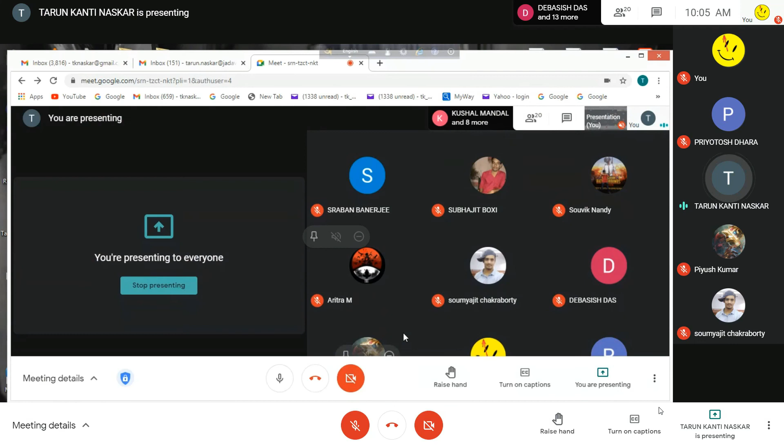Today I am in district, so the video will not be opened. There may be a problem. Can you listen to me? Yes, sir.

Okay, now my first proposal is one date should be fixed for the first class test. Which date should it be? Getting 1 week time will be sufficient.

Hello. That means if it is on the 10th. Sir, second week of December would be better, sir, like middle of December. 10th is second week, so mid of December, sir. Yes, mid of December, then 14th. Yes sir, give us 2 weeks then we can do it. So properly, make it 14th December, is it?

Okay, so 14th December, that is Monday. What is your class time? It is from 1 to 2, is it? Okay, so 14th December will be your class test.

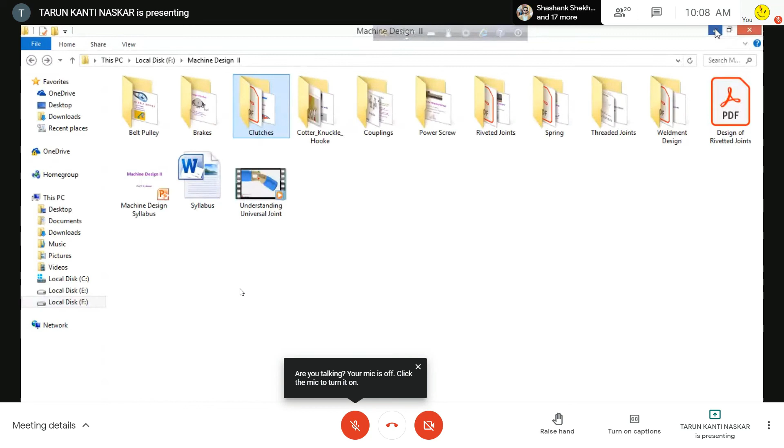And regarding the syllabus of the class test, it will be coupling, power screw, riveted joint, and threaded joint. Coupling, power screw, riveted joint, and threaded joint. Is it okay?

Sir, can you please remove the threaded joint? I think 3 topics would be fine for us, given the time period. The rest, keeping in mind, will be too large for your second test.

So the syllabus will be: coupling, then threaded joint, riveted joint, and power screw, on 14th December. Coupling, threaded joint, riveted joint, power screw - that is the syllabus for the first test. I have written it on the chat. So this will be your syllabus.

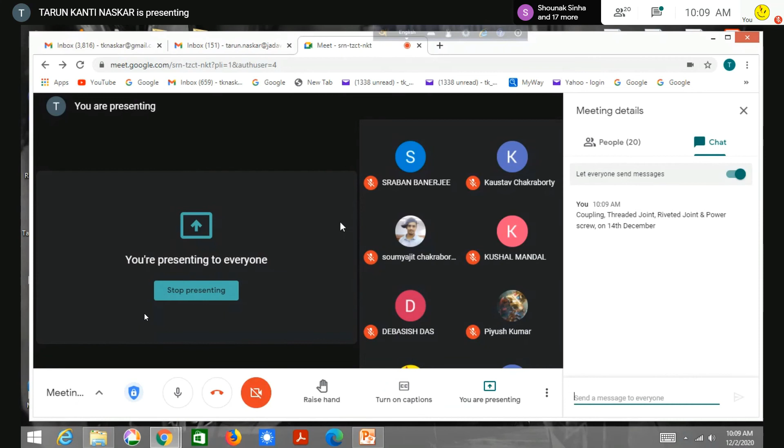Now let us start. The screen is visible, yes sir. So today we will discuss the cone clutch.

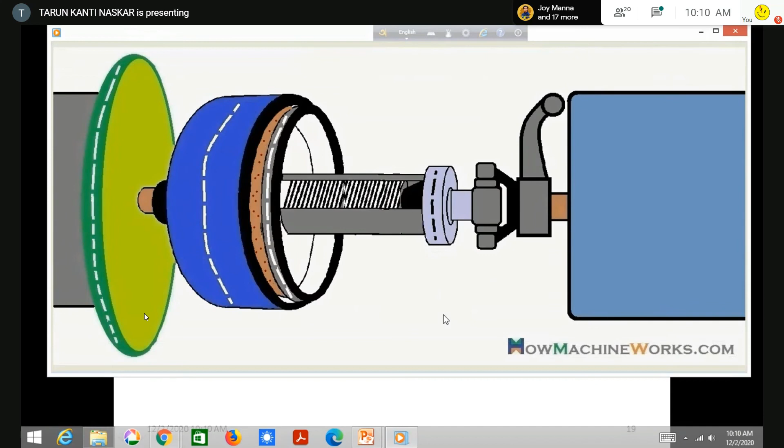Now there is a video regarding the function of the cone clutch. Can you listen? Is the video audible? Sir, the video is not that audible. The video settings are not that audible.

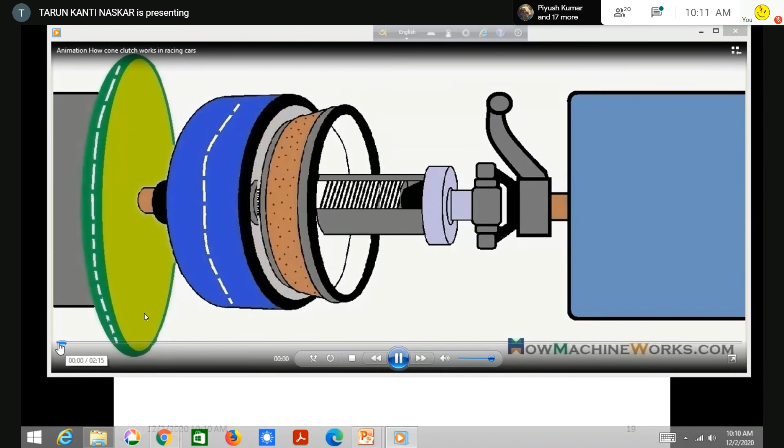Hi guys, welcome to HowMachineWorks.com. Today, with the help of this animation, let's learn how a cone clutch works. First, we will identify all the components in the system, then explain its working with the help of this animation.

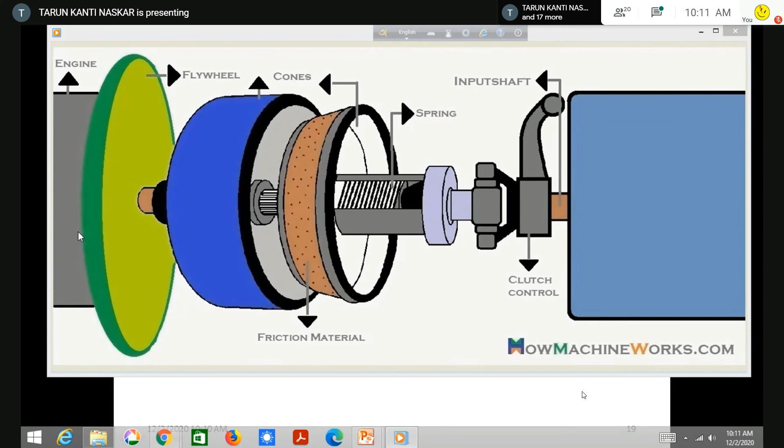First, that's the engine, then we have the flywheel. Those are the two cones - the blue one is the female cone, the brown one is the male cone. On the male cone we have friction materials. That's a spring over there, and that's the clutch control. That's the input shaft towards the transmission, and finally we have the transmission or the gearbox.

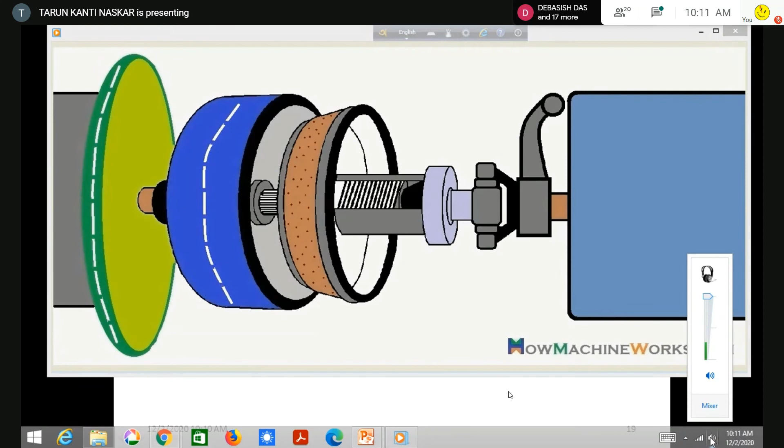Now let's see - the drive is getting towards the flywheel from the engine, and as the female cone, which is in blue, is part of the flywheel, it also starts rotating. So you can see the female part of the cone rotating, and the male part is disengaged from the female part. So the drive is not going into the male part or into the transmission. That's the portion highlighted where the male cone mates with the female cone, and that's the friction material over there.

As the male cone moves inside, they mate together and the drive goes towards the transmission. Now I am activating the clutch lever control so that the drive can be transmitted, and the male cone gets in contact with the female cone. So now you can see the drive from the flywheel, reaching the female cone, is carried away by the male cone, and it gets into the input shaft and finally towards the transmission. That's how the transmission gets the drive.

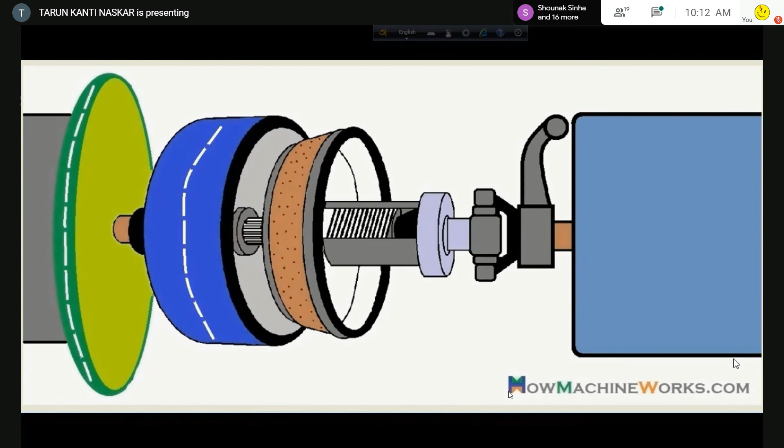Now I am moving the lever back so that the clutch can be disengaged. The female part is disengaged from the male part - you can see the male part going away, and now the drive from the flywheel rests with the female clutch, and the drive is not going into the transmission. That's how simply a cone type clutch actually works, and this is mainly used in racing cars also. I believe you understand how it works. For more videos, please click.

Hi guys, welcome. This is the engine. How a cone type clutch exactly works. First, we'll identify all the components in the system. Then we'll explain its working with the help of this animation.

First, that's the engine. Then we have the flywheel. Those are the two cones. The blue one is a female. This female part is attached to the driving side. This male part is attached to the driven side. On the male there is the spring, and this is the

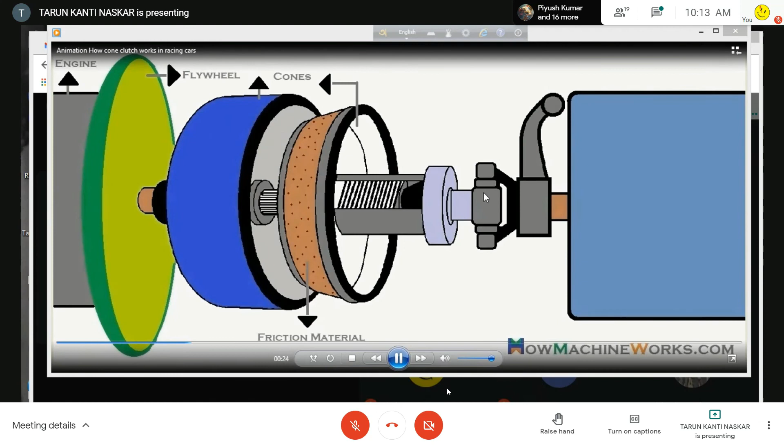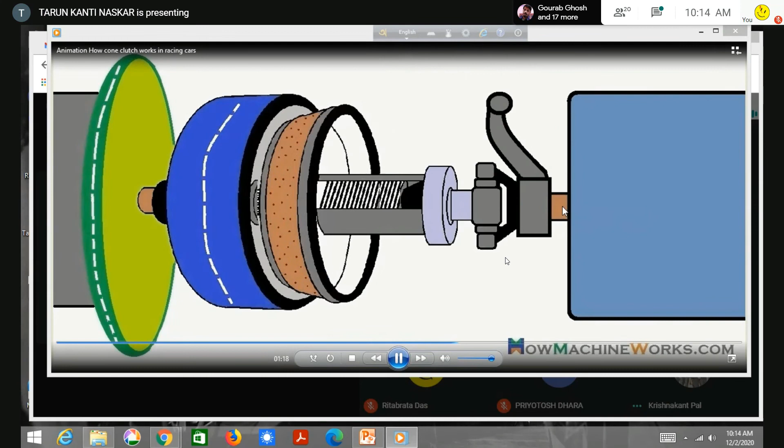lever or clutch control arm, and there is this spline shaft so that it can be shifted. When the engine is moving, the flywheel is moving, and it gives speed to the female part of the clutch, this blue part. Now when it is driven to that, this friction lining comes in contact with that. Then this shaft rotates, and then it gives power to the transmission gearbox. This is the transmission gearbox.

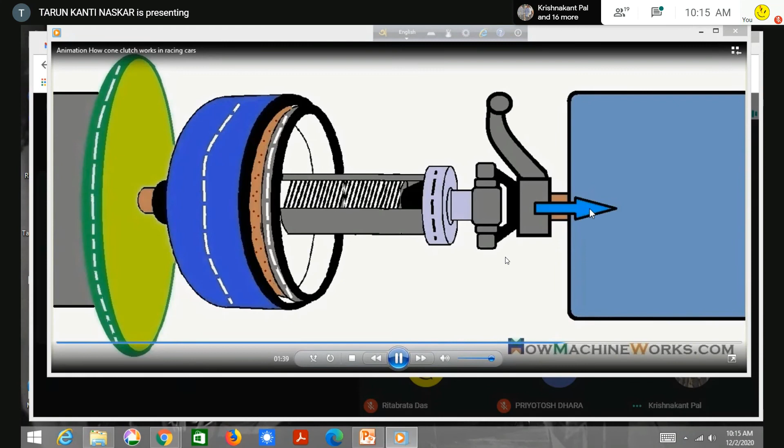Then when we disengage it by moving this, this will be shifted to that side. So you see this is being shifted to that side. When this is shifted, the engine is rotating, the flywheel is rotating, this clutch is rotating, but the driven side is not rotating. So this is the function of the cone clutch.

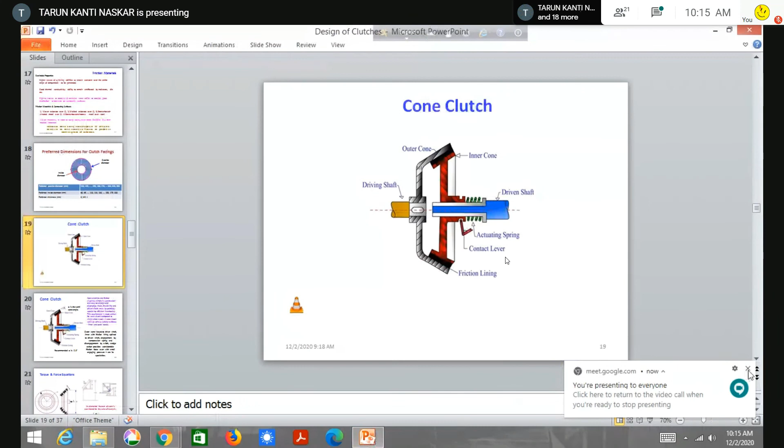Would you understand? Yes, sir. Okay. Sir, can you replay the last part, the cone clutch, the lever part?

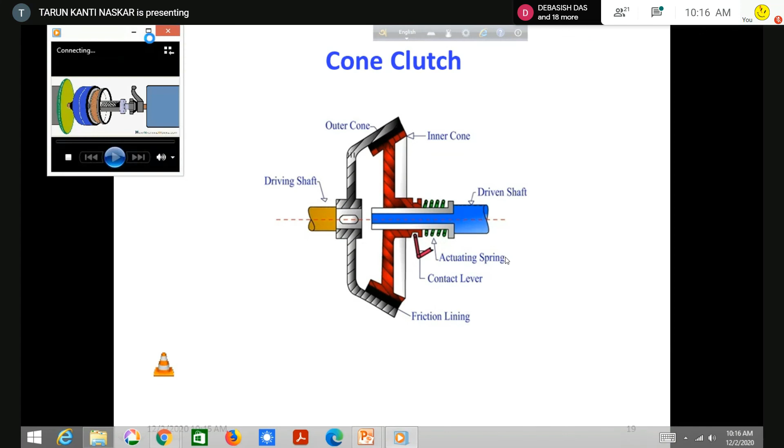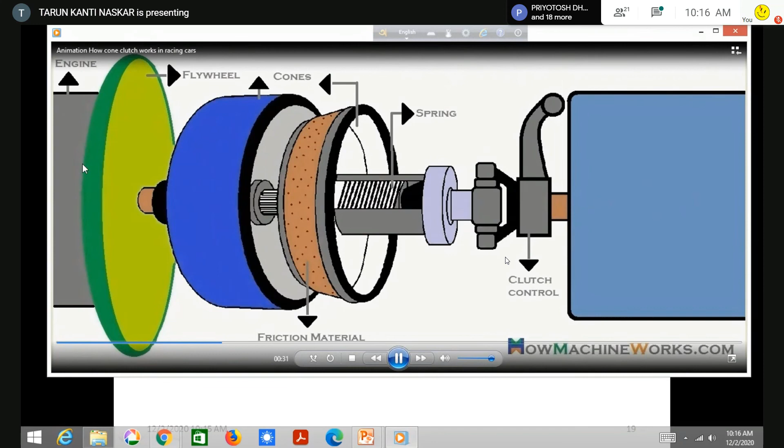Today, with the help of this animation, we will see how a cone clutch works. First, we identify all the components. This is the lever. By moving this lever, it is engaged or disengaged. When it is engaged, the speed of the engine comes over there to the transmission gearbox input shaft. And when it is disengaged, in spite of movement of the engine, there is no speed to the transmission gearbox because it is disengaged.

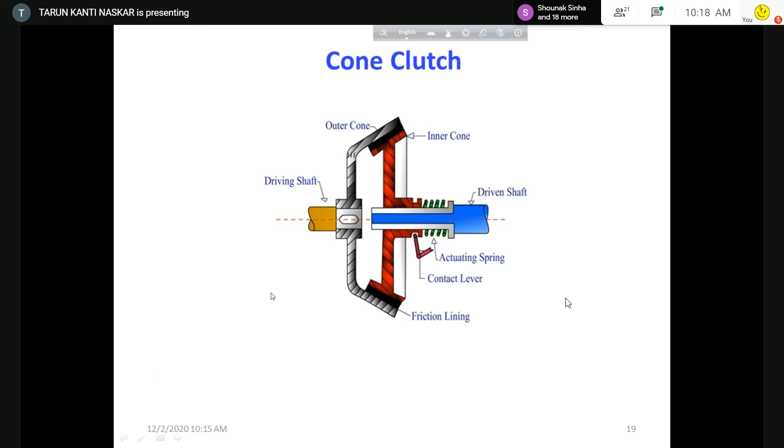Sir, you will give us the question and we'll have to give you back the answers within a stipulated time? Yes, and that time is fixed by the university. That I will tell you. Just remember what is the time. Okay, sir. Pretty much clear, sir. Understood, sir. Thank you.

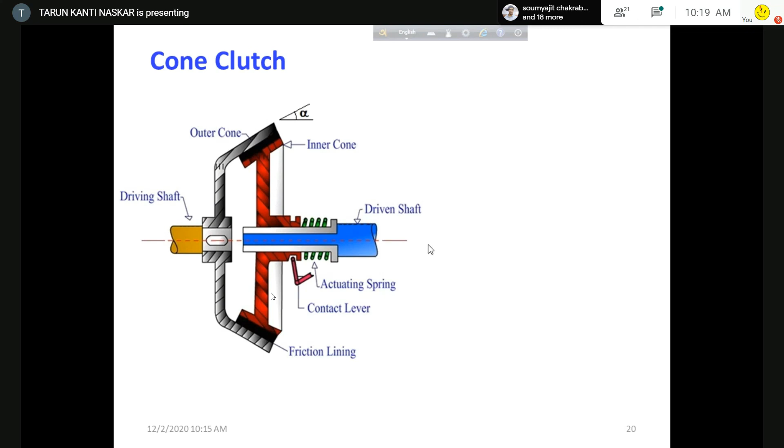Now this is the cone clutch. Cone clutches are friction clutches. Obviously, it is simple in construction, easy to engage and disengage. Now this is the driving part. This is your female part. This is your male part. The female part is attached to the driving side. The male part is attached to the driven side. And there is the handle, the contact lever. Now there is a friction angle, friction material. And due to this wedge action, the engagement and disengagement is very easy and complete.

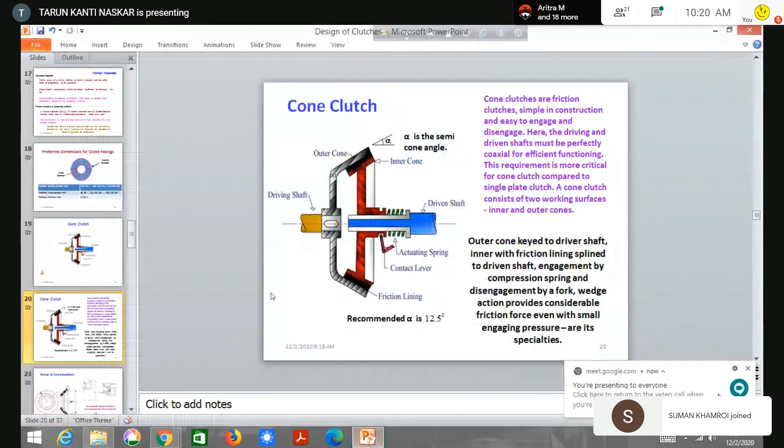Now one requirement for this is that they should be perfectly coaxial, otherwise there will be problems. Obviously you can understand the necessity of this requirement. So a cone clutch consists of two working surfaces, one inner and another one outer. Now the outer cone is keyed to the driving side, I have already told you. Now this wedge action provides considerable friction force. Even with small engaging pressure, there is considerable friction force. This is the advantage of this type of clutch.

Now alpha is the semi-cone angle, and the recommended value of this semi-cone angle is 12.5 degrees. And there is a deduction. I will show you the deduction, how we reach this value of 12.5 degrees and why it is 12.5 degrees. That will be discussed later. Okay, so the description is clear.

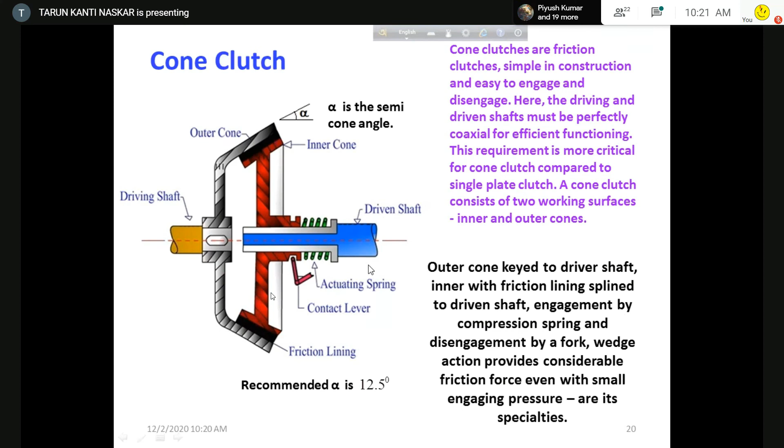Is it clear description? Yes, sir. Okay.

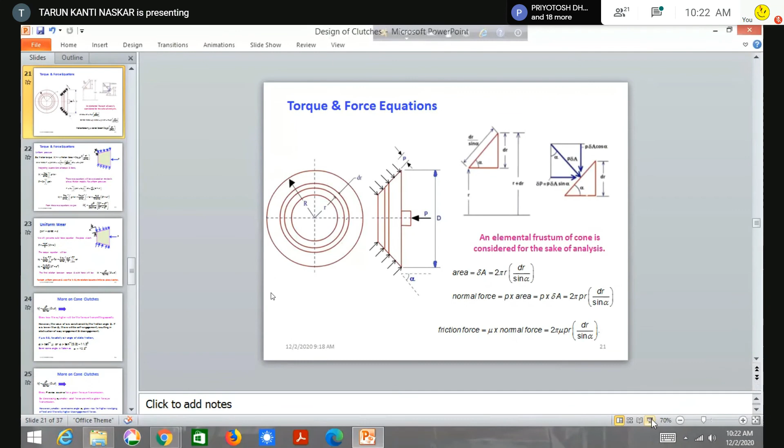Now for forces, this is the normal force p delta A. This is p, small p. So p delta A is the normal force. Now this is p delta A cosine alpha, and this is p delta A sine alpha. So this is the elemental frustum of cone.

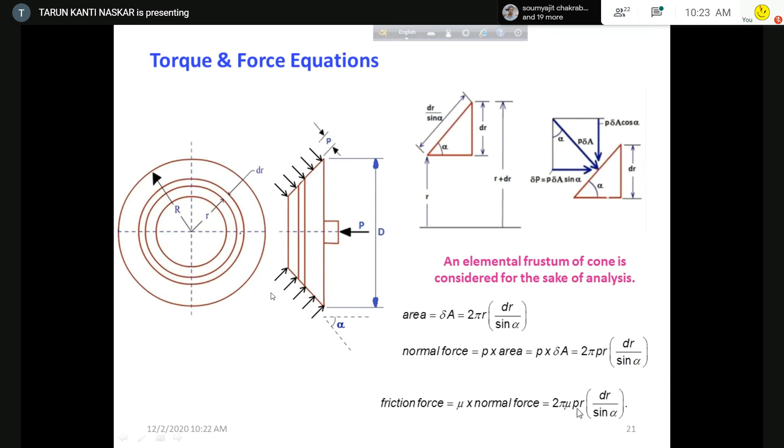Now area. Area is delta A, that is twice pi r multiplied by dr by sine alpha. Now normal force is p multiplied by area, that is p multiplied by delta A, which is equal to twice pi p r dr by sine alpha. So this is the normal force. Now obviously the friction force is obtained by multiplying by mu, that is twice pi mu p r dr by sine alpha.

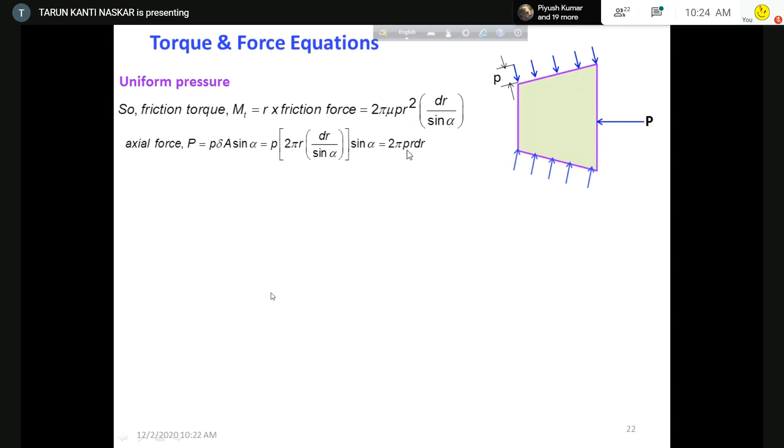Now we have to use two models, uniform pressure and uniform wear. Friction torque MT will be r into friction force, that is twice pi mu p r square dr by sine alpha. So this is the friction torque. The axial force P is small p delta A sine alpha, and ultimately the expression for axial force P is twice pi p r dr.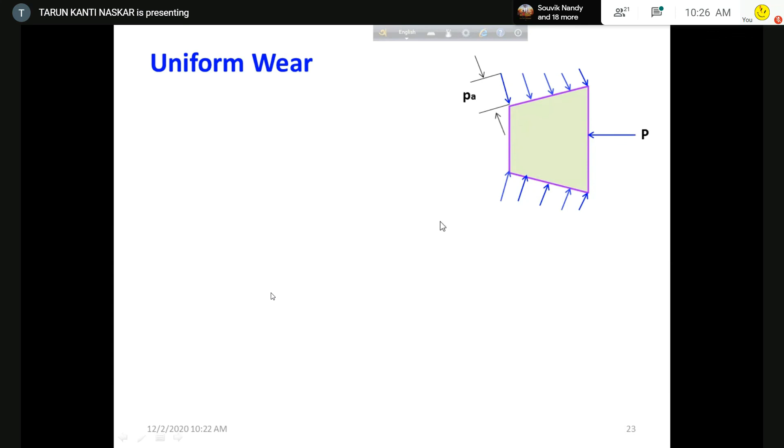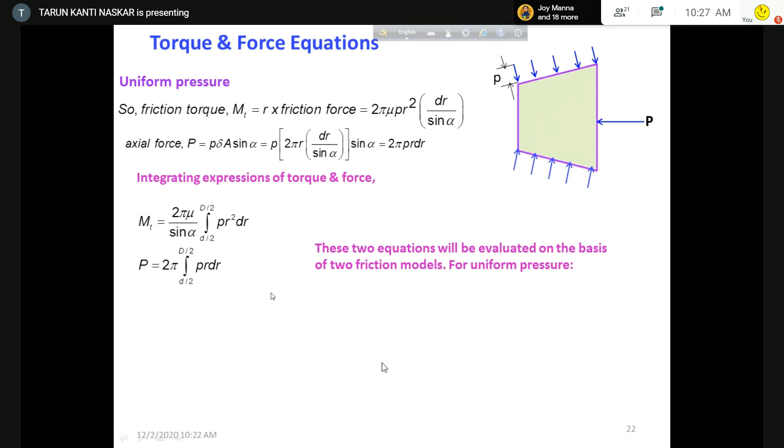Now for uniform wear, p r is equal to constant. So p will be varying obviously, such that r is increasing and p is decreasing so that this is constant. And we will get the same axial force equation as the plate clutch. Now the torque equation is this expression from the earlier slide. This is the expression for torque.

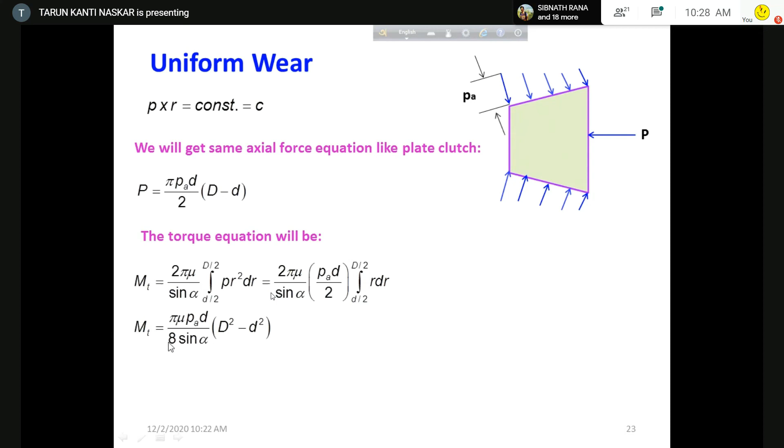Integrating this, since p r is constant, you take out p r. p r means p a d by 2. Then integrate r dr between small d by 2 and capital D by 2, and the expression for MT will be this. So the final relation between torque and axial force will be MT equal to mu p by 4 sin alpha into D plus small d. Put alpha equal to 90 degrees, the expression will be the same as for the plate clutch. You only have to introduce sin alpha when you are considering the cone clutch. For both uniform pressure and wear, if alpha is 90 degrees, the relations become similar to plate clutches.

Is it okay? The wear equations, is it okay? Is it clear to you? Anyone respond? Are you here? Yes, sir. Oh, I am searching whether you are here or not.

Sir, can you please redisplay the derivation of the frictional torque? Yes.

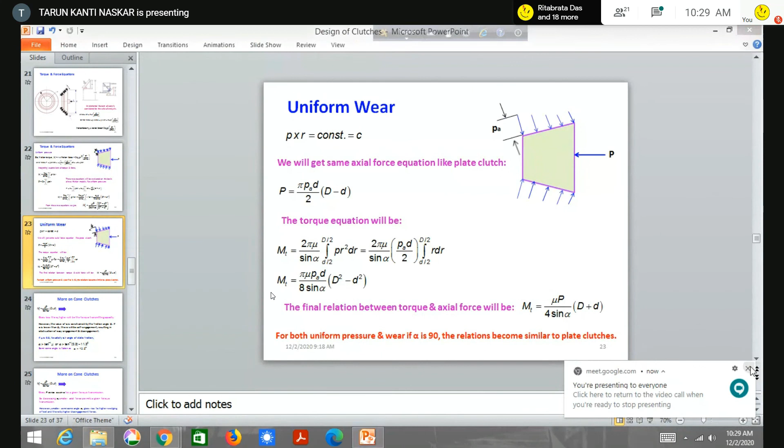Okay, sir. It's okay.

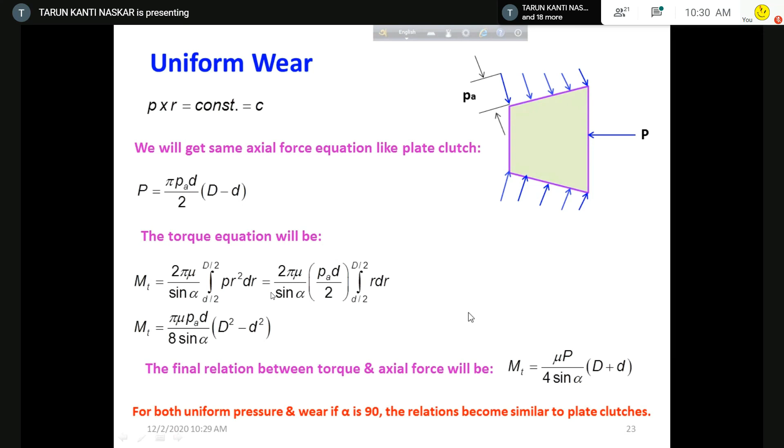You have to take out PR, and PR means PA d by 2. Okay, can I go to next slide? Yes. So this is the expression for MT.

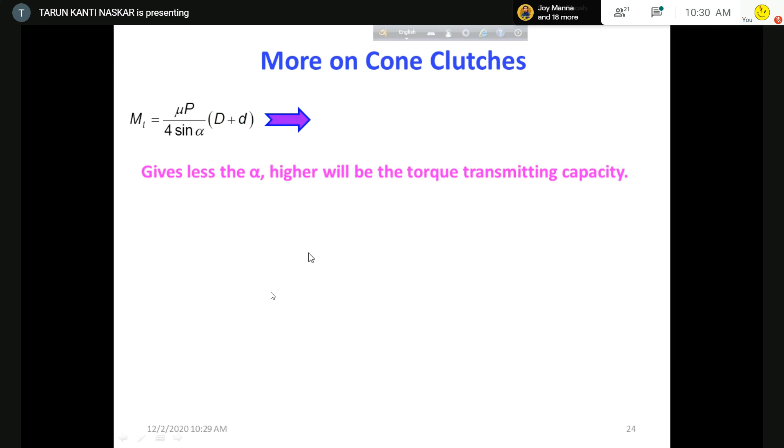Now this equation gives: the lower the alpha, the higher the torque transmitting capacity. But when alpha is less, there will be a problem for engagement and disengagement, that is more wedge action. However, the value of alpha is constrained by the friction angle also. If alpha is lower than phi, that is the friction angle, there will be self engagement, resulting in obstruction of easy engagement and disengagement.

Okay, so there is a constraint for lowering the value of alpha, and say if mu is 0.2, to satisfy alpha greater than the angle of static friction, alpha should be greater than tan inverse mu, means alpha should be greater than tan inverse 0.2, that is 11.3 degree. So considering different values of mu, we normally take alpha equal to 12.5 degree. That means it should not be very low. It should not be lower than this, because if it is lower than this, there will be more wedge action, and more wedge action means there is a problem of engagement and disengagement also.

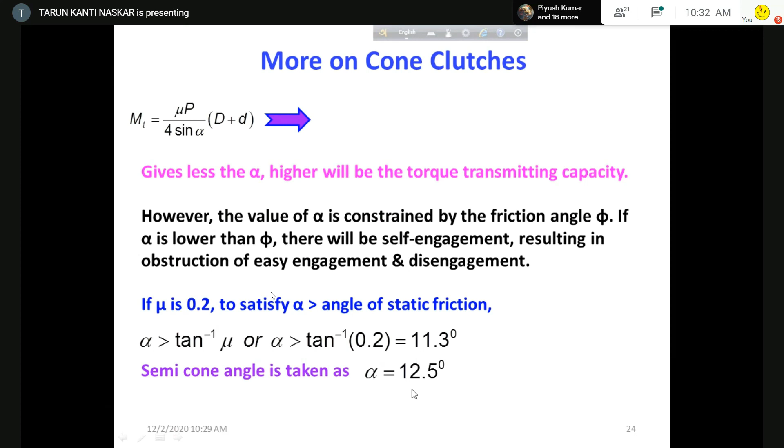Okay, and another constraint is phi. Is it okay? Clear? So I pointed out the value of 12.5 degree, why it is normally recommended as 12.5 degree.

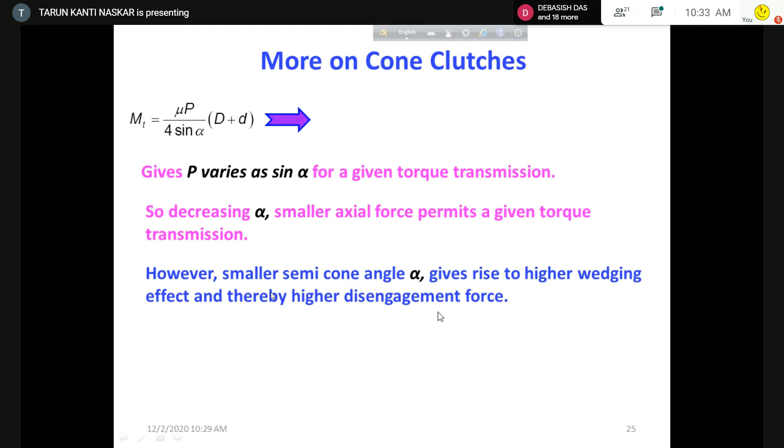Now some more points. If MT is constant, that means for a particular value of MT, P varies as sin alpha for a given torque transmission. So decreasing alpha, smaller axial force permits a given torque transmission. That means decreasing alpha, the sin alpha value is decreasing, so P will be decreasing, that means smaller axial force. But smaller alpha means smaller semi-cone angle, so higher wedging effect, thereby higher disengagement force. Engagement is very easy, but higher disengagement force.

This point is okay? Now this is the ratio of MT value for cone and plate. So MT cone by MT plate equals 1 by sin alpha. That is 1 by sin 12.5 degree, so 4.62. So MT cone is so much higher. For given dimensions, torque transmitting capacity of cone clutch is higher than that of single plate clutch.

Is it okay? So we have to consider the constraints for lowering the value of alpha. One is the wedging effect, and another one is the value of static angle of friction. Okay, is it okay? Can I go to next slide?

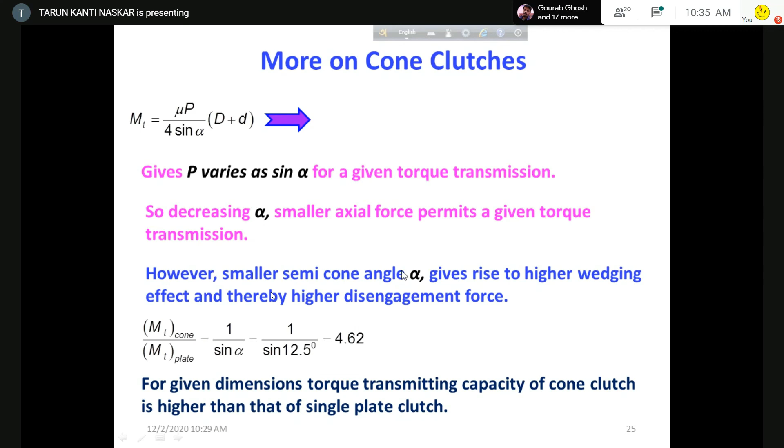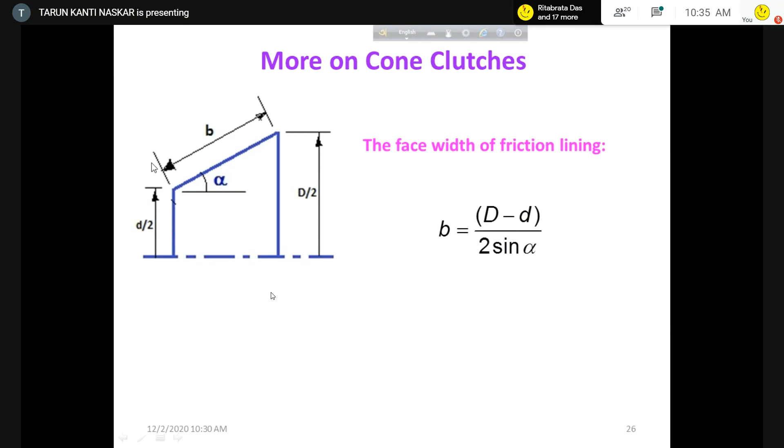Now face width of friction lining. So this is the face width of friction lining, and the expression for face width is this. Okay, this is all about cone clutch. Now we will go to the centrifugal clutch. This is a very simple expression, that is the face width of cone clutch. Now centrifugal clutch. It is very interesting, and there is a video.

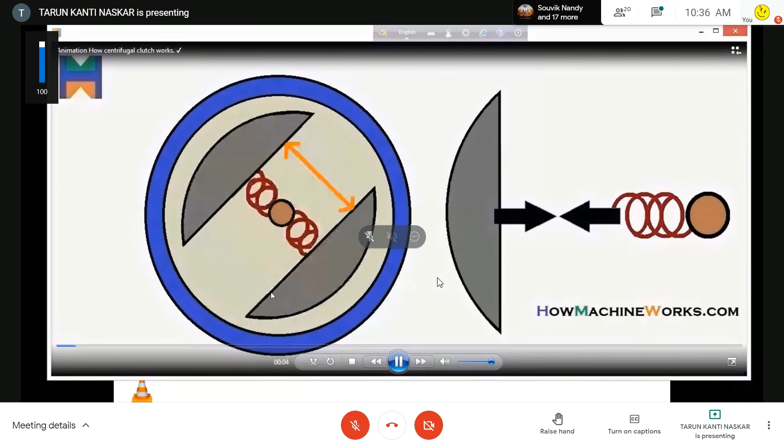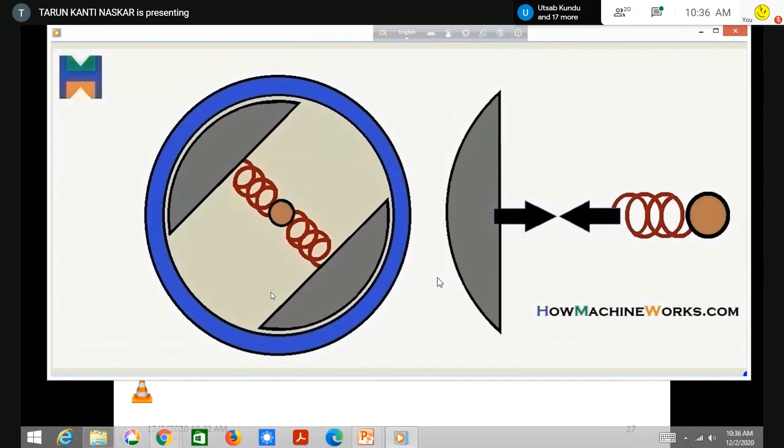Hi guys, welcome back to howmachineworks.com. With the help of this animation, let's learn how a centrifugal clutch actually works. So on the screen you have a centrifugal clutch animation. That's the clutch housing. Transmission. And we have clutch shoes inside. Then we have the engine shaft that's drive from the engine reaching the centrifugal clutch. Then we have the springs connecting the clutch shoes with the shaft.

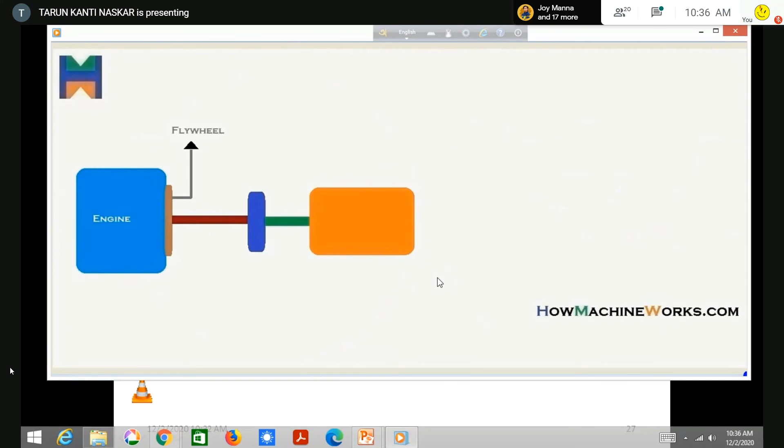Right, so let's see the location where the centrifugal clutch is located. So that's our engine. Okay, then there we have the flywheel. After the flywheel, we have the engine drive shaft. The drive from the engine is going to the clutch. That's the centrifugal clutch over there. Right, then that's the drive to transmission. From the clutch, the drive goes to transmission. And finally, our transmission is there. So let's have a closer look, a zoom look at the centrifugal clutch. So that's a centrifugal clutch, right? And inside we have the clutch shoes, the springs, and the shaft from the engine. So that's here. Okay, that's the location. So now let's see further. When the engine rotates, the RPM goes through the engine shaft. Again, let's see, that's the engine shaft.

It rotates there inside the centrifugal clutch. That results in the centrifugal clutch shoes also rotating because the shaft is connected to it. So as it rotates, what happens? There's a clutch housing connected to the transmission, that's in blue. But you can see the clutch shoes and the clutch housing are not connected because there is a gap. As there is a gap, the drive from the engine, which is reaching the clutch shoes, is not going to the clutch housing. Thereby, it's not going to the transmission.

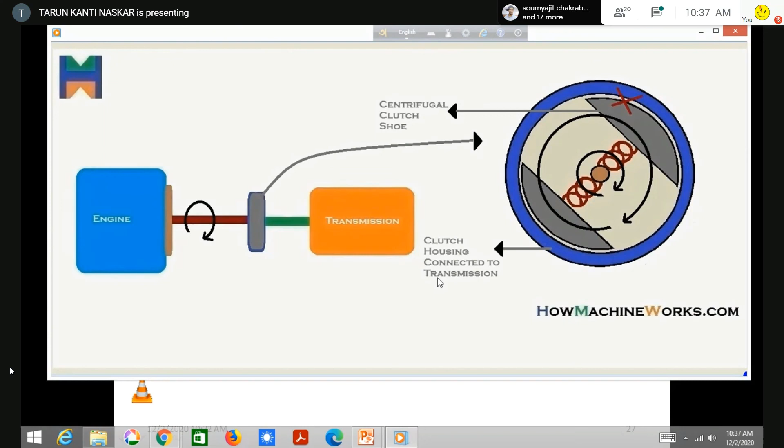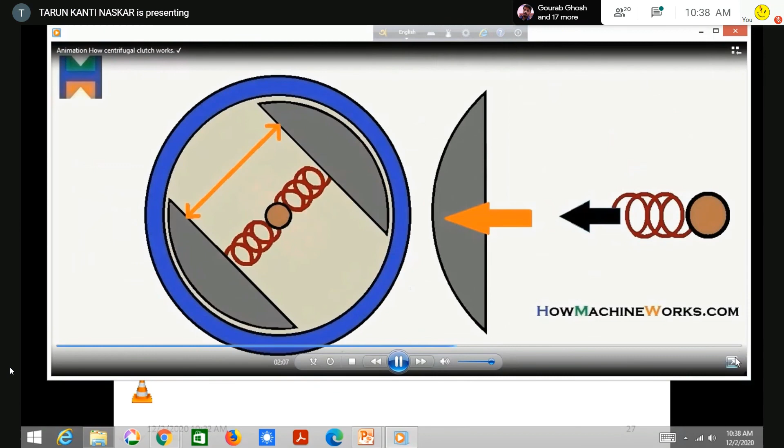So this is how it looks. This is the clutch shoes rotating inside. And as the RPM increases, due to the centrifugal force, you can see the clutch shoes actually get closer to the clutch housing. And further, as the speed increases, they get in contact with the clutch housing. And that's how the drive from the engine, which is reaching the clutch shoes, is getting transmitted to the clutch housing, and thereby it goes to the transmission. This is due to the centrifugal force. That's why it's called a centrifugal clutch.

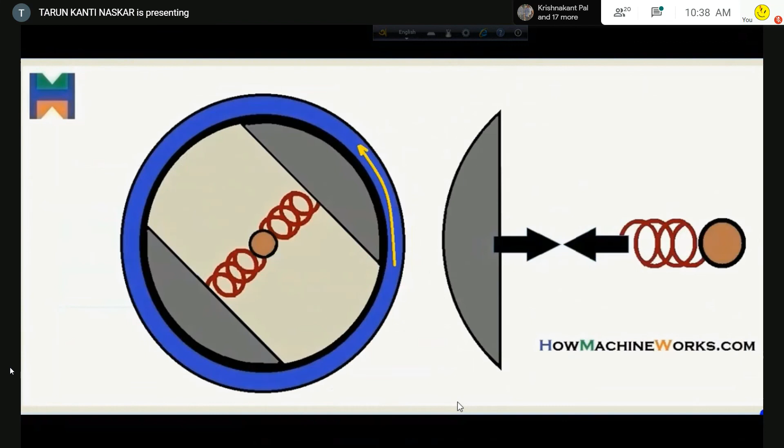So let's see in more detail. The engine is getting the drive. So the engine shaft here rotates like this, and that drive is getting to the shaft inside the centrifugal clutch. As it rotates, you can see the shoes, that's the centrifugal clutch shoes, and the clutch housing get in contact, so that the drive gets to the clutch housing. So that's how the clutch housing is rotating. And see now, as it is in contact, the clutch housing is now rotating.

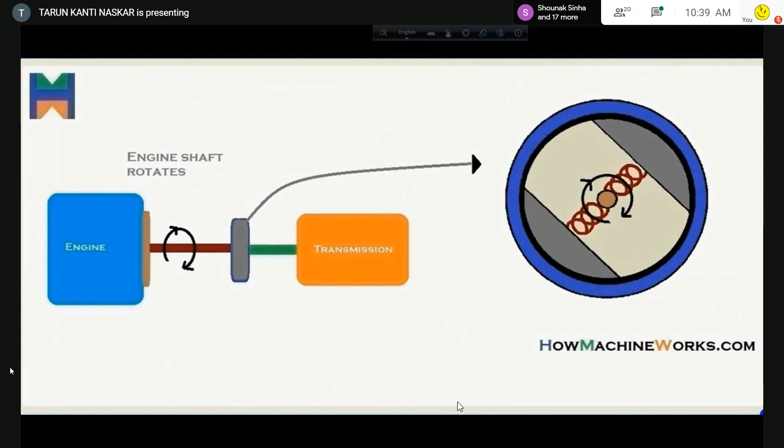And as the clutch housing rotates, the drive from the housing, as it is connected through this particular shaft, the green shaft, that's the clutch shaft, rotates, and that makes the drive reach the transmission finally. So that's how a centrifugal clutch actually works. So I believe you understand its working.

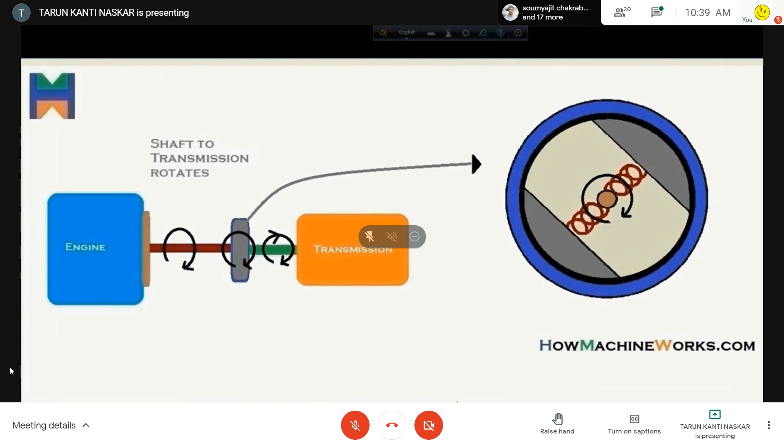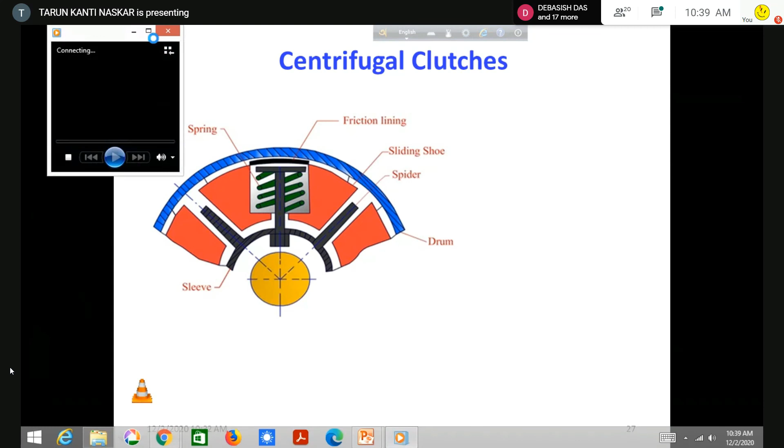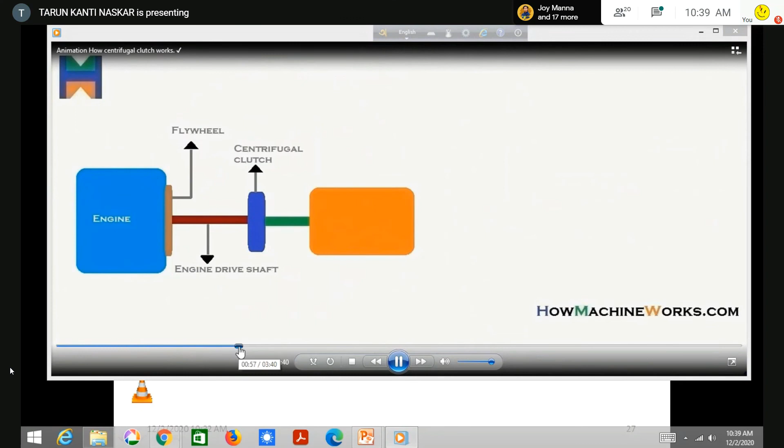There is a spring. So the spring is loaded, which means initially, when it is stopped, the load on the spring is such that they are disconnected. So there is a gap. There is a gap between the shoe and the clutch. This is the shoe, and over it there is a friction lining.

Then what happens when the speed of the engine increases to a certain level? The centrifugal force overcomes the spring force, and as the speed rises, the spring is extended and under tension, and this shoe comes in contact with the clutch, and then ultimately the full synchronization. When full synchronization occurs, the engine speed will be equal to the clutch speed. Then the clutch rotates. When the clutch rotates, the arrangement is such that this green shaft rotates, and then the transmission.

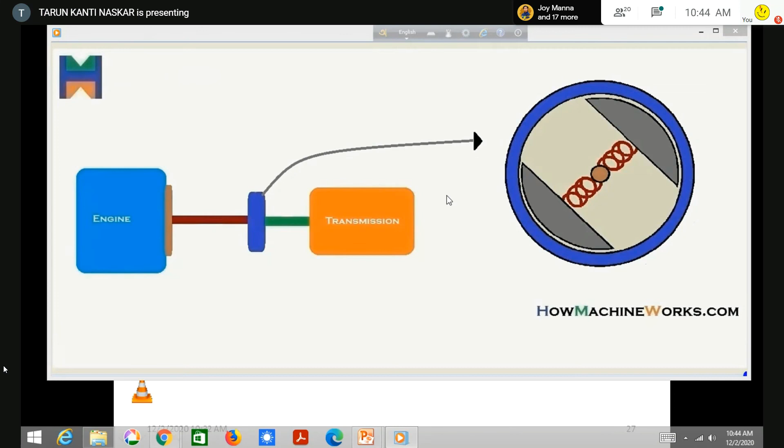Yes, sir. Is it clear? Okay. Then we will go to the equations.

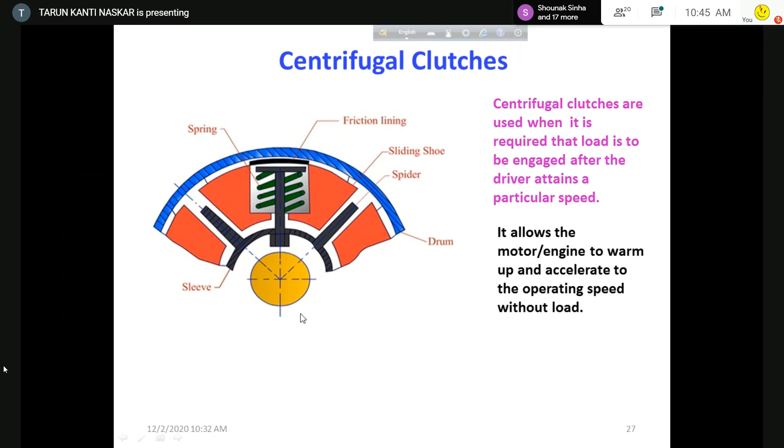Centrifugal clutches are used when the load is to be engaged after the driver attains a particular speed. After attaining a particular speed, the process of engagement starts. It allows the motor or engine to warm up and accelerate to the operating speed without load. Before this shoe comes in contact with the drum, the engine is rotating with no load condition. Is it clear? So it works on this principle.

The centrifugal clutch consists of a spider with four equally placed radial guides, so that the shoes can go into them. There is a spring loaded sliding shoe in each guide. The spider, shoes and springs are inside a coaxial drum, which is attached to the driven side. With the increase of speed of the driving shaft, centrifugal force increases to ensure contact. With the decrease of speed, disengagement occurs. After the speed decreases to a certain level, there will be no contact and the engine will run with no load condition.

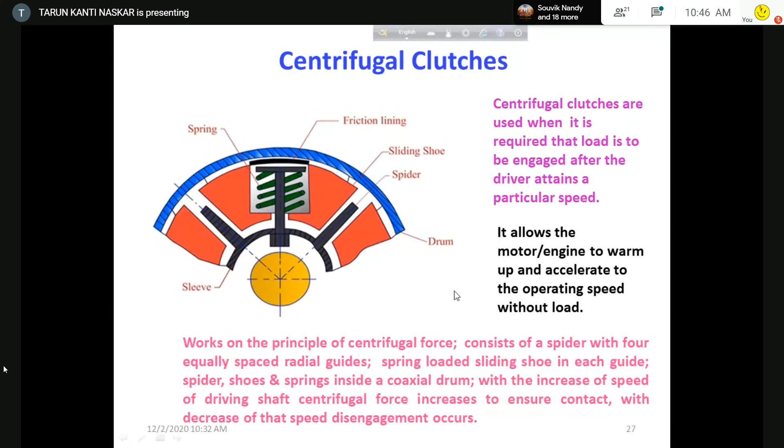Is the description clear? The figure is clear? Hello? Yes, sir. Okay, thank you. Yes, sir. Clear.

Let us go to the mathematical equations. This is the drum, this is the shoe, this is the spring. This is RD, the drum radius, and this is RG, the center of gravity of the shoe. So we have the radius of drum RD, radius of center of gravity of shoe RG, mass of each shoe m, centrifugal force, spring force, number of shoes, running speed, and engagement speed. That means when engagement just starts.

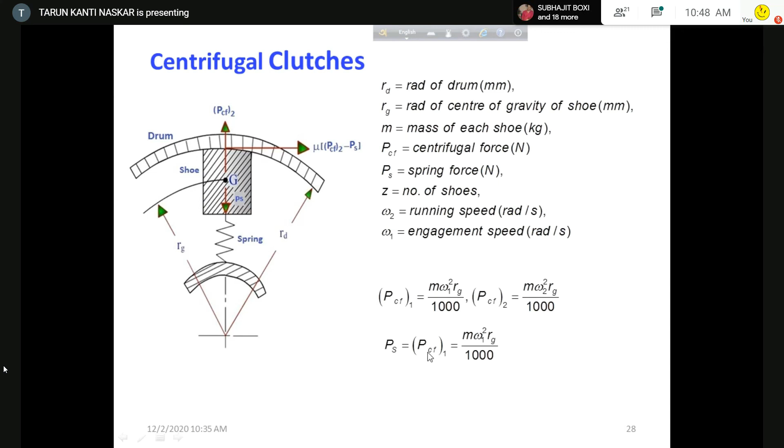When engagement just starts, we have the centrifugal force. Omega 2 is the running speed, at which it should run. These are the expressions for centrifugal force, and PS should be equal to the centrifugal force when engagement just starts. Now when centrifugal force just exceeds the spring force, the shoe begins to move radially outward and engagement occurs. In the running condition, the net force acting on the drum is PCF2 minus PS, that is PCF2 minus PCF1, equal to m RG (omega 2 squared minus omega 1 squared).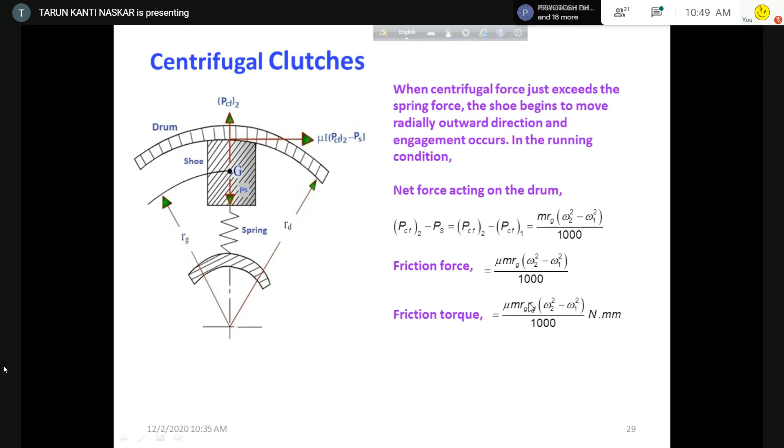This is the net force acting on the drum. This is PCF2, and this is mu. So the friction force will be mu multiplied by the net acting force. Multiplying by RD gives the expression for friction torque. There are Z number of shoes, so for Z shoes the friction torque will be mu m RG RD Z multiplied by (omega 2 squared minus omega 1 squared). This is the total friction torque for Z number of shoes. Is it okay? It's okay. Yes, sir.

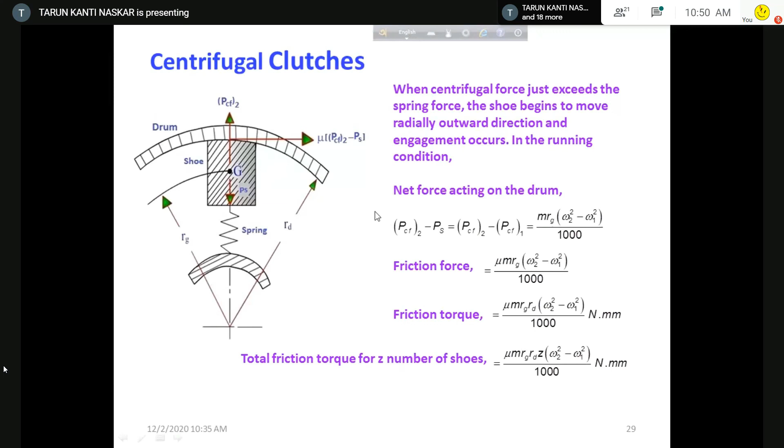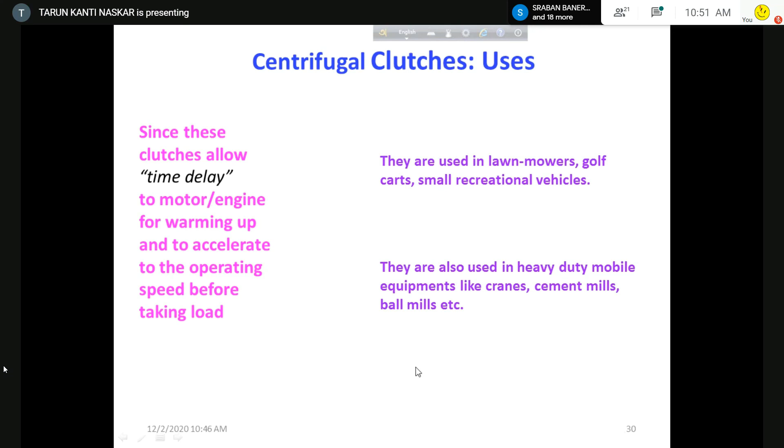Now, the uses. There is a time delay, which I have already explained. These are used for lawn mowers, golf carts, small recreational vehicles, and also for heavy duty mobile equipment like cranes, cement mills, ball mills, etc. These are very important because this is heavy duty equipment. If engagement starts at the start of the engine or motor, there will be a problem. At the start of the motor there should not be any engagement. When the motor attains a particular speed, it is eligible for taking the load. So for heavy duty load, use of a centrifugal clutch is very helpful. This is my point. Is this particular point okay?

Now, the dimensions for the friction lining. You see, this is the shoe in exaggerated form. This is the length of the shoe, and this is the breadth of the shoe, the width of the friction lining. So the area of the friction lining is l times b. The force acting on the drum is the pressure PA multiplied by l b. The net force on the drum for one shoe is m RG (omega 2 squared minus omega 1 squared). So PA multiplied by l b equals this. We can find out the dimensions of the friction lining from these equations. It's okay. Yes, sir.

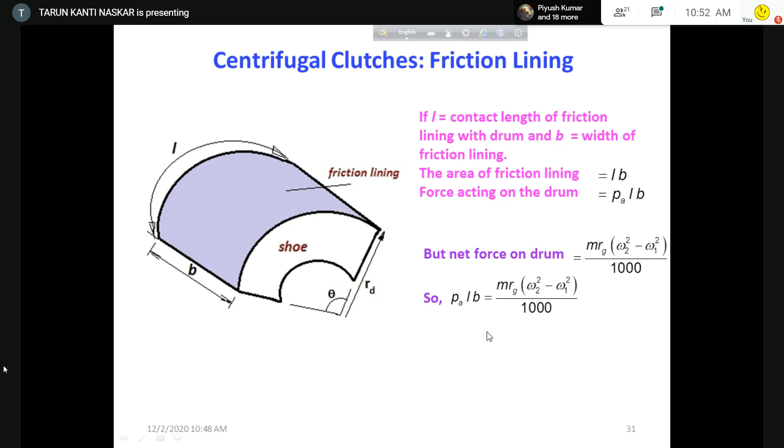Now, energy consideration. Since there is friction lining for the entire clutches, whatever may be the shape of the clutch, whether it is a plate clutch, cone clutch or centrifugal clutch, friction is the main point of consideration here. So there is generation of heat. If heat is generated, there must be some arrangement for cooling, otherwise it affects the friction quality.

Now say this is the driving shaft omega 1, this is the driven shaft omega 2, with I1 and I2, and this is the clutch, and they will be coming in contact. So we are going for the equations of motion and the energy equations, that is, heat dissipation. This is the equation of motion for the driving shaft. It is very clear. Now for the driven shaft, this is the equation of motion. It is very clear.

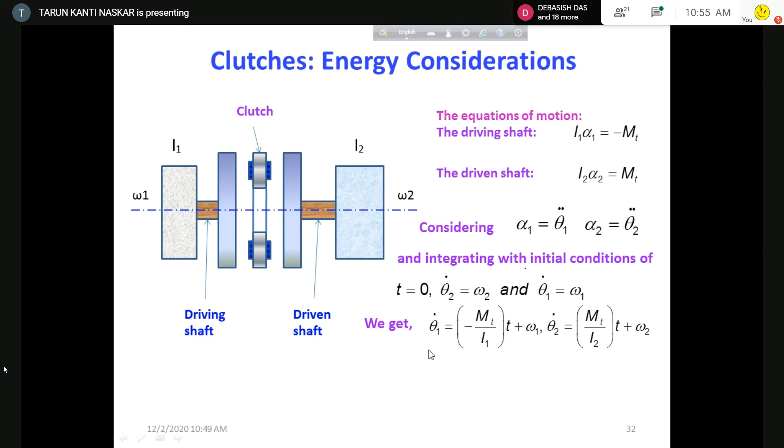Now considering alpha 1 equal to theta 1 double dot and alpha 2 equal to theta 2 double dot, and integrating this equation with initial conditions at t equal to 0, theta 2 dot equal to omega 2 and theta 1 dot equal to omega 1, we get this after integrating. The equation is very simple. Whether you integrate or not, you will understand this equation. These omega 1 and omega 2 are the integration constants.

So, the relative velocity between driver and driven shafts at time t will be theta 1 dot minus theta 2 dot. The theta 1 dot and theta 2 dot expressions are known to you. So this is the expression for the relative velocity between driver and driven shaft at time t. That means when complete engagement or complete synchronization is not done, there is relative velocity.

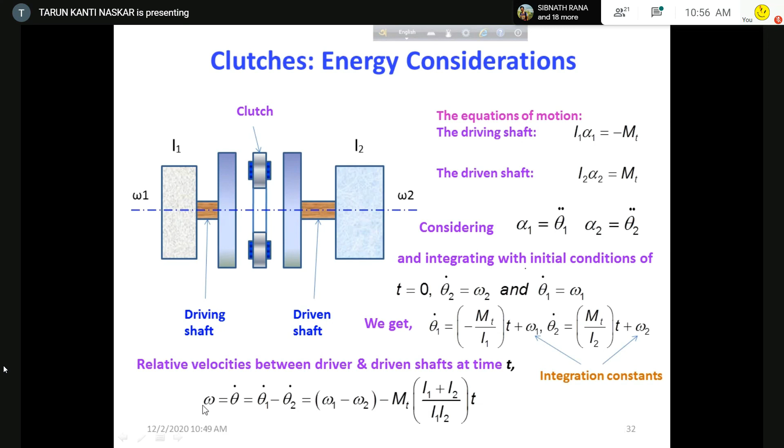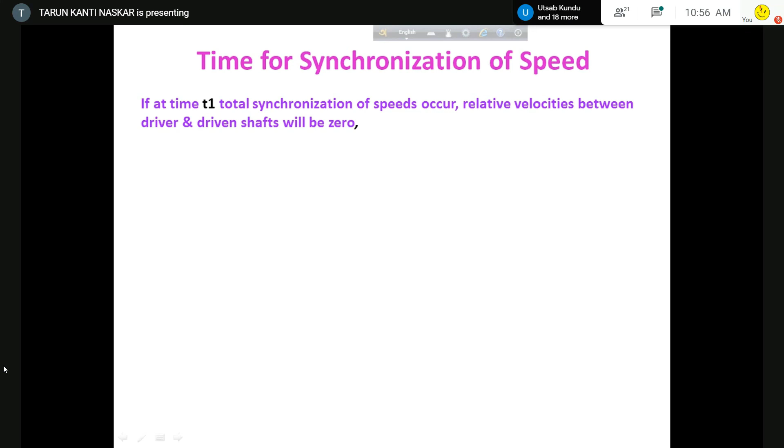Now, time for synchronization of speed. How much time will it take? If at time t1 total synchronization of speed occurs, the relative velocity between driver and driven will be 0. Putting 0 in the expression of relative velocity, we can find out t1. So t1 is (omega 1 minus omega 2) I1 I2 divided by (I1 plus I2) into Mt. So the time for complete clutching is directly proportional to the difference between the angular velocities of the shafts and inversely proportional to the torque.

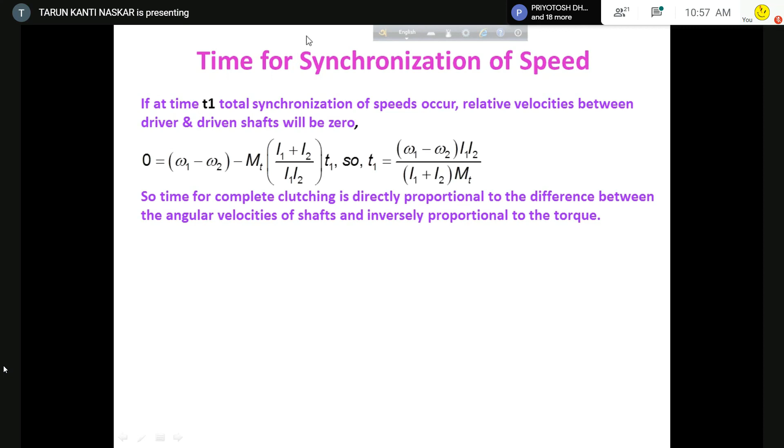Directly proportional to the difference between the angular velocities, that is omega 1 minus omega 2, and inversely proportional to the torque. So heat will be generated during this clutching operation. This is the energy equation, the rate of energy dissipation. Mt multiplied by angle is the work, divided by t gives the rate of energy dissipation. That will be equal to Mt multiplied by omega. The expression for omega is already there, so this is the rate of energy dissipation.

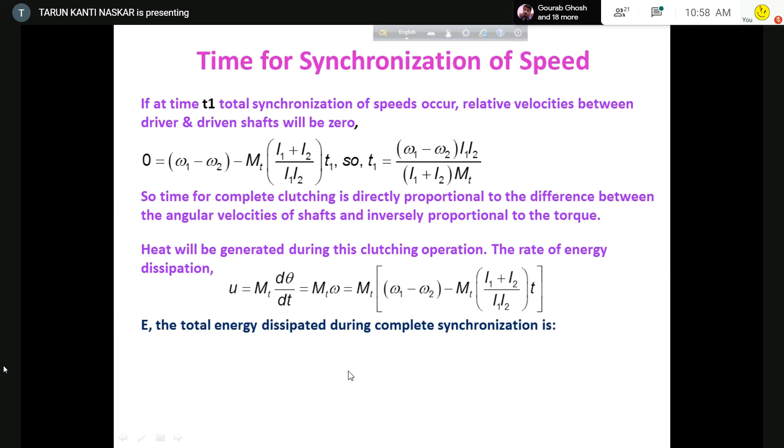So the total energy dissipated during the complete cycle of synchronization, from 0 to t1, is the integral of u dt. We are doing the integration, and from this we can write the total energy dissipated as Mt multiplied by (omega 1 minus omega 2) t1 minus Mt square, etc. So this is the total energy dissipation at the time of complete synchronization. Is it clear?

Hello? Yes, sir. So this expression is clear. So putting the value of t1.

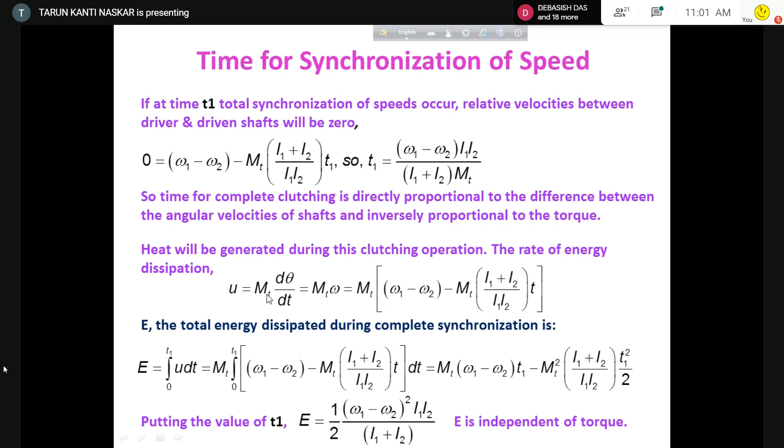Okay. So we'll stop here, because the heat dissipation part we will discuss in the next class. There are 3 more slides. These 3 slides we will discuss in the next class. The class will be finished. Okay.